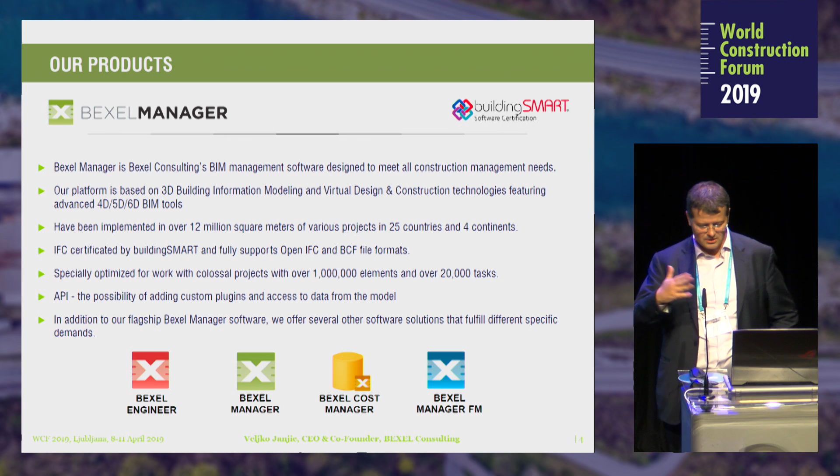Also, what is very important, as I mentioned in IT, we always collaborate and share. So we have our own API, so we can easily integrate our platform with any other solution. We did this integration with a number of companies, and this helped us a lot, especially now for sensor data integration, because every manufacturing company has its own standards. So now they could easily integrate with our platform.

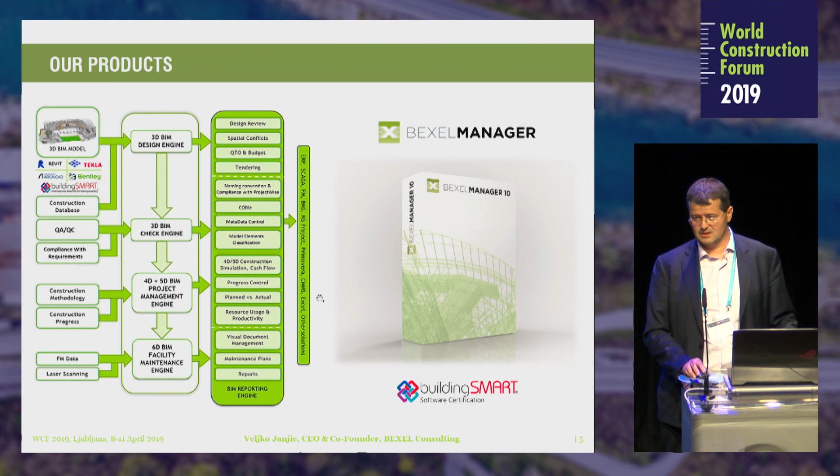So essentially, we have a 3D engine, which does clash detection, quantity takeoff, budget analysis, tendering, and so on. We have a 3D design check engine, which does design analysis, clash detection and a number of additional verifications. Then we have a 4D, 5D project management engine, and at the end we have a 6D BIM facility maintenance engine. So here I'm going to give you several examples from one project. We were among the top 6 projects in the world last year.

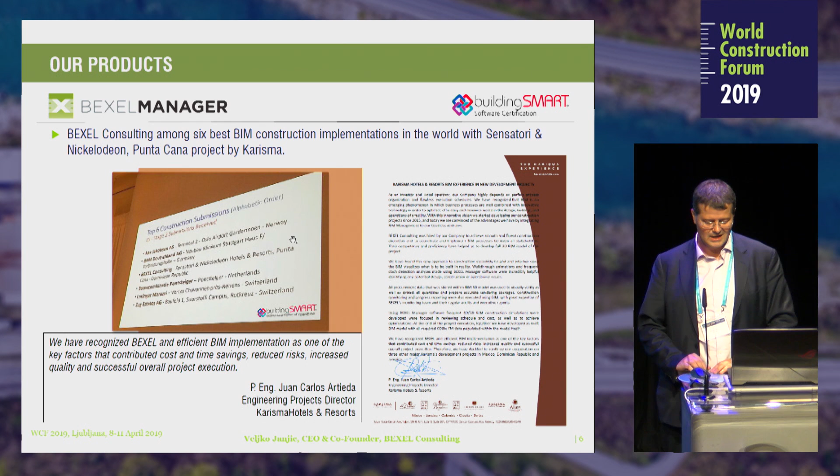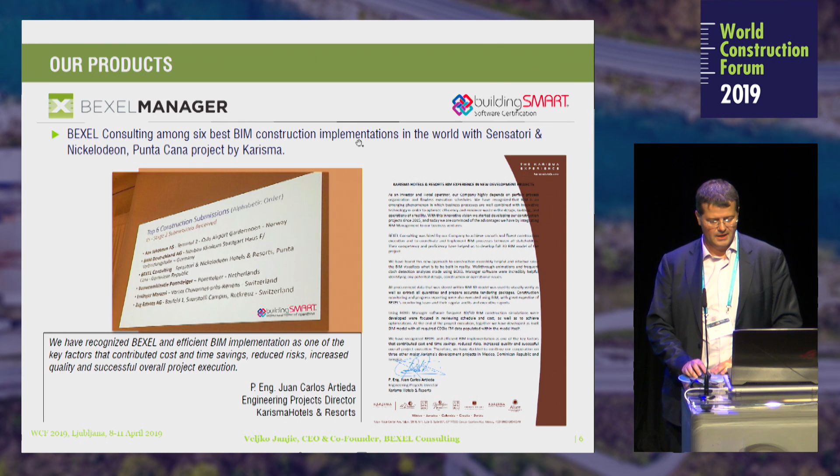This is a project, Sensatori Nickelodeon in Punta Cana, and the investor was Karisma. And this maybe is very important. We didn't pay for this, but this was done by the World Economic Forum. So they did the research: what is the key technology in construction in the future, and which is going to have the highest impact? And integrated BIM is on top. Everything else is of course important, drones, 3D laser scanning, prefabrication, and all other stuff, but integrated BIM is something which is the future.

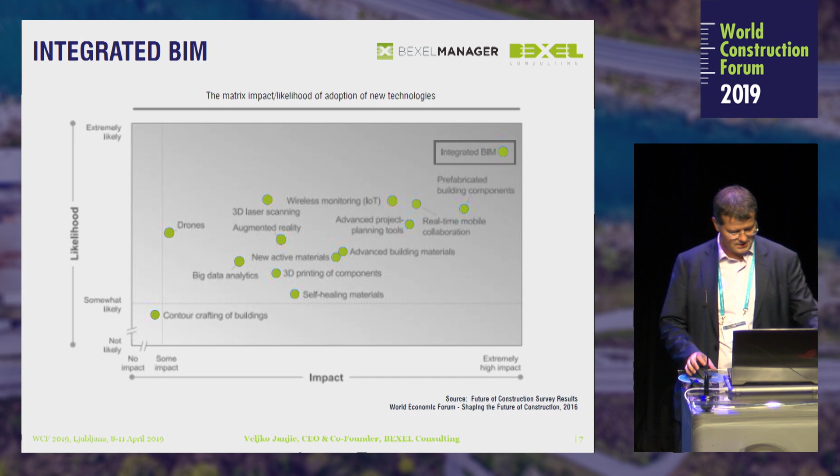And in this case, I'm going to show you now one first video. It's a 3-year-old video, so it's not brand new. Actually, now this project is finished. So this was done before construction commenced. This is for the next World Cup championship in Qatar. And we are BIM project managers on this project, and Bexel Manager is used for this project.

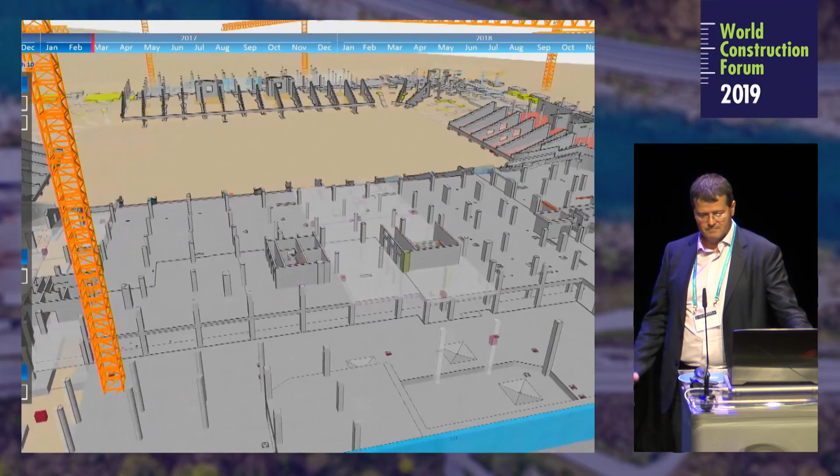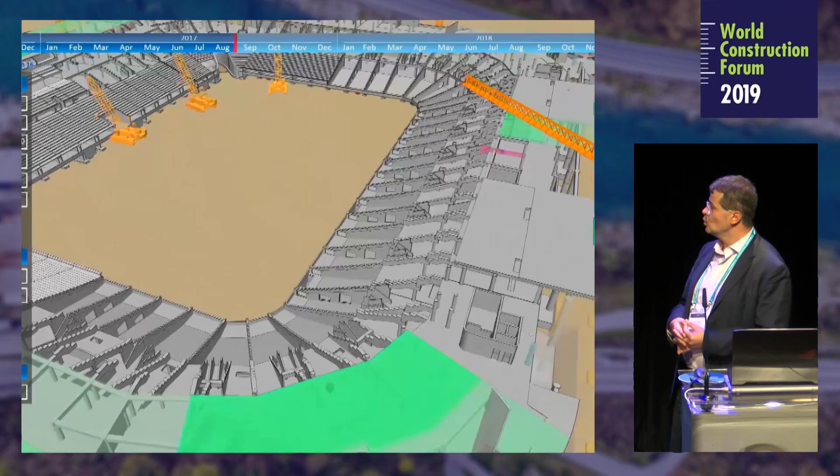So this project has more than 1 million elements, and the total value of the project is $600 million US. With our platform, which can automatically generate tasks in an intelligent and standardized way, the total number of tasks is more than 20,000. But what was very important is that you can very easily update the 5D simulation based on current progress. And actually, we are going to finish this project in a month.

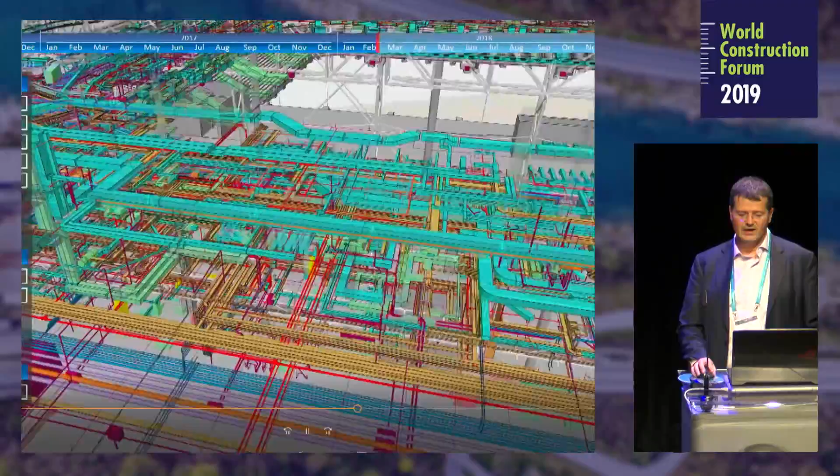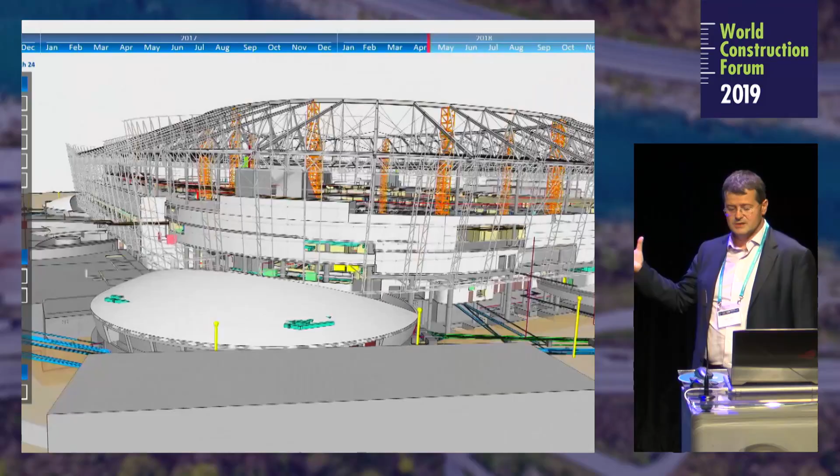So here, why do we say it's 5D, what does 5D BIM mean? You have the 3D model, you have time, which is 4D, and then by convention, we use money as 5D. Here are percentages because the exact data is classified, but the total amount, as I mentioned, is $600 million US dollars. So you can see with this integrated approach you can really organize your works in an efficient manner. You can track the progress, you can track monthly payment certificates, and you can really manage the project until the end.

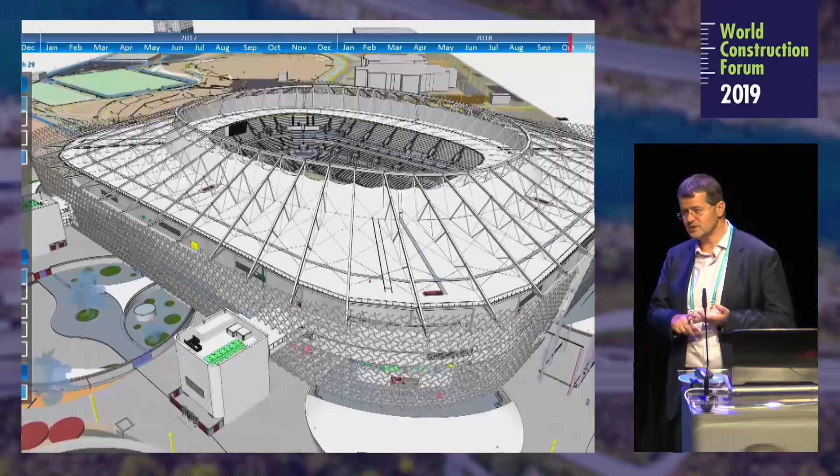What is also very important is the asset management aspect. So now every element has attached all documents, all COBie data. That's one international standard we use for the facility maintenance stage. And so all maintenance plans are attached. So the model is now fully ready for the asset management stage when it's finished.

So now just to give you a short overview of the key benefits of what could be done in this integrated approach. We name them use cases, but these are just the most important ones. So first of all, visualization. Of course, for the investor in this case, it's very important to visually see, do they like this project or not? So this is one benefit. Again, these are real visualizations, not like in other systems where you have 3ds Max when you try to impress someone. Here you can see all flaws even in this design.

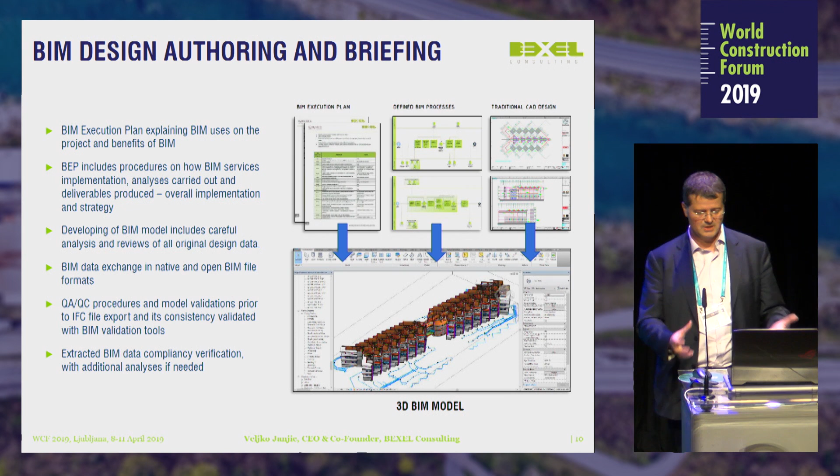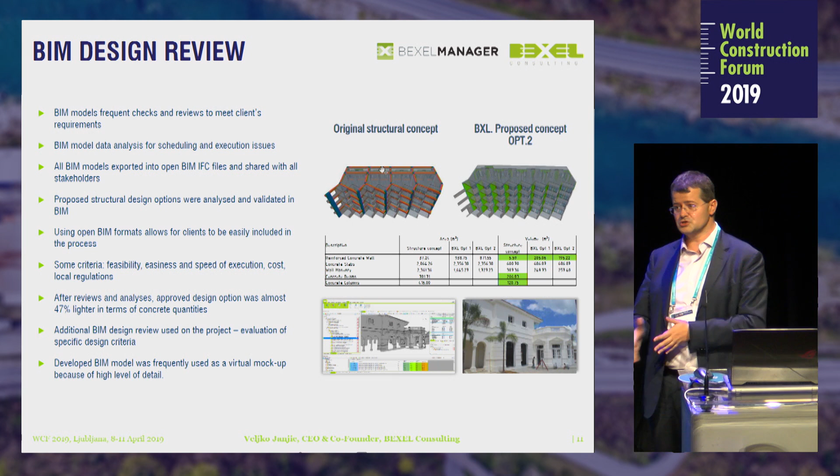So these are visualizations. Then you have to define all your processes, how you integrate the model. In this case, we use a number of different BIM tools and integrate them within Bexel Manager. Then you can do design review, optimization of design, which is also very important. What is crucial is the latency. Whenever you change something in design, you immediately have the impact on cost or quantities and so on. So you can really optimize something. In the traditional way, when you change something in CAD, you need to spend an additional 2-3 weeks to verify how the quantities are changed.

Then automatic clash detection. This is something which is now commodity and standard. A number of tools have it. Very important is that you can easily, in less than a second, detect clashes. For example, just one rhetorical question. On that particular project, Al Rayyan Stadium in Qatar, the total number of conflicts, clashes we have found so far, is more than 100,000. And I don't want to name designers. There are 9 design companies, and the lead design company is one of the most famous. And they didn't do anything wrong compared to previously done projects. The challenge is that we as humans cannot identify those clashes easily.

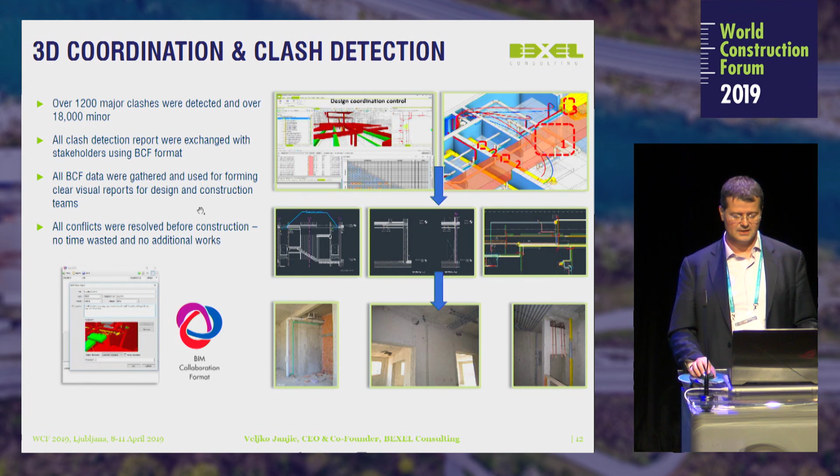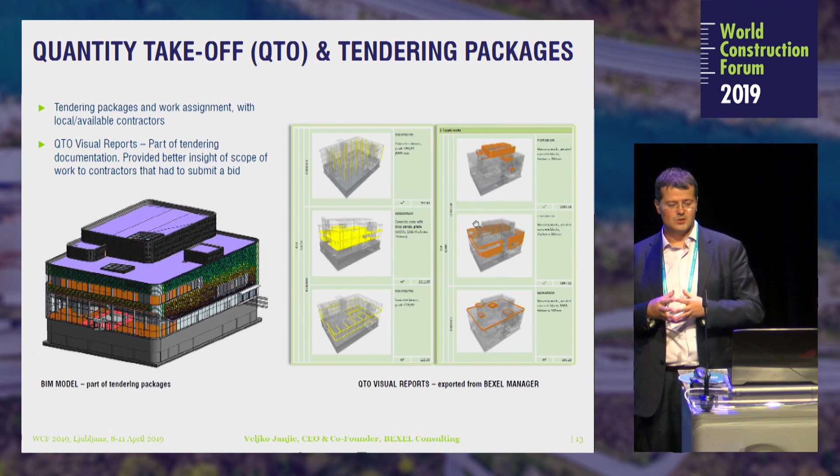Then quantity takeoffs, very important. You can visually see where those quantities are. So the risks in the entire project management are much, much lower. And that is very important.

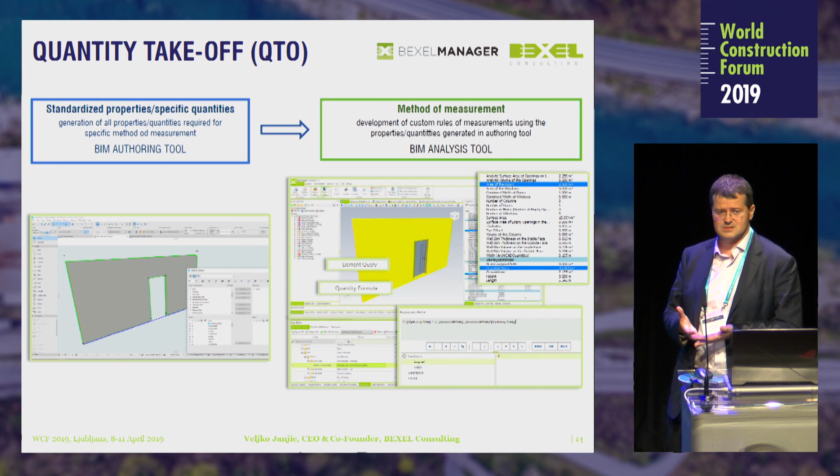Then there are standards. We have now, for example, in 25 countries, in America, the UK, Russia, Kazakhstan, Japan, Korea, Germany, Italy, Spain, Slovenia, Bosnia, Serbia, Austria, various classification systems and cost databases, and they can work easily in Bexel Manager. What I envision, I strongly believe, is that in the future, in 100 years, we are going to have the same cost database or the same classification system. I know that now someone is thinking, what am I talking about, Germans will never change their standards.

But that same story was, could you imagine 250 years ago, before the French Revolution, when someone said, we will create one thing, we will call it meter, and everybody in the world except Americans and Burma will use this as a standard. At that time, we had more than 1,000 different measurements for length in the world. And we somehow agreed that it's efficient for us.

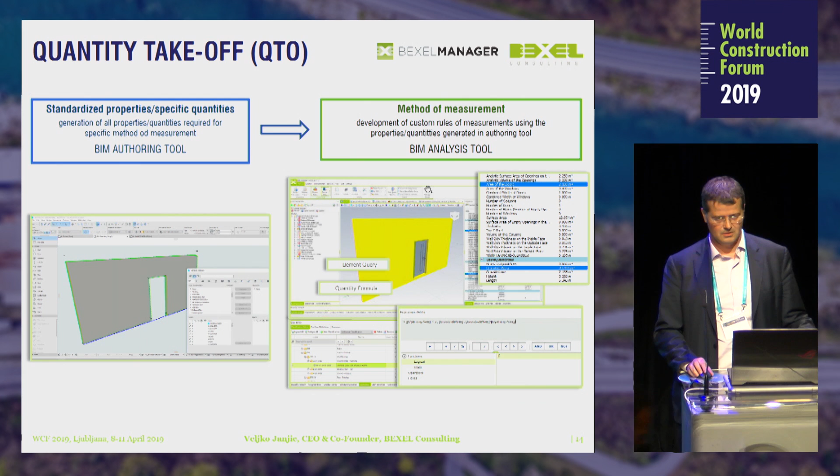The same goes with this. Why do we need to have a different cost items classification? The buildings are the same. And gravity is the same, so there are no specific rules to have it. But anyway, in order to be present at the market, we now develop these BIM cost databases. And they're very important for us, because when you know formulas and you know which elements, this could be done automatically in our system.

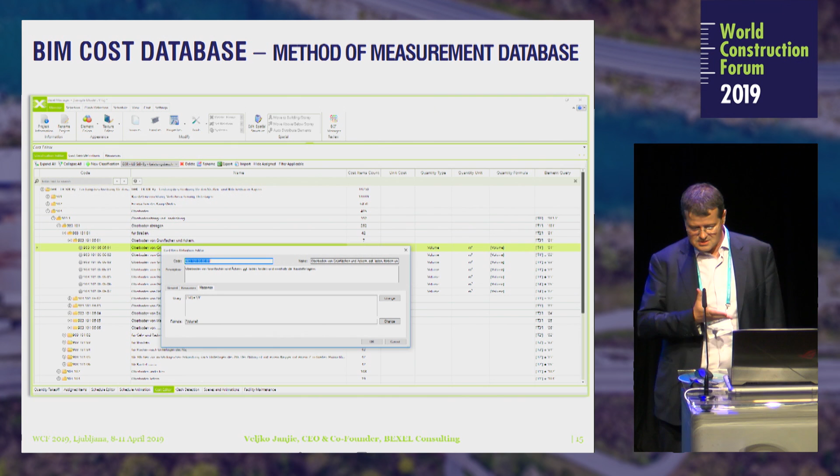Unfortunately, we don't have so much time to elaborate this now. You can, in a second, generate the entire cost for a building. And it could be later adjusted based on your experience. But this is something which is really feasible and doable. And if you think as someone from, I don't know, the airplane business or any other industry, you will realize that they are doing the same. They have the tools and methods already developed for these things. So this is something we implement as one very important thing.

Another very important thing is how we generate this 5D simulation. It's not manually generated. We know a number of information in the building information model. So we know that those walls are concrete walls. We know that those windows are on the 5th floor. We know that those ducts are in building B, and so on. And then we know all those details, because building information model is not visualization, but everything is about data. Data are crucial. Metadata are crucial for us.

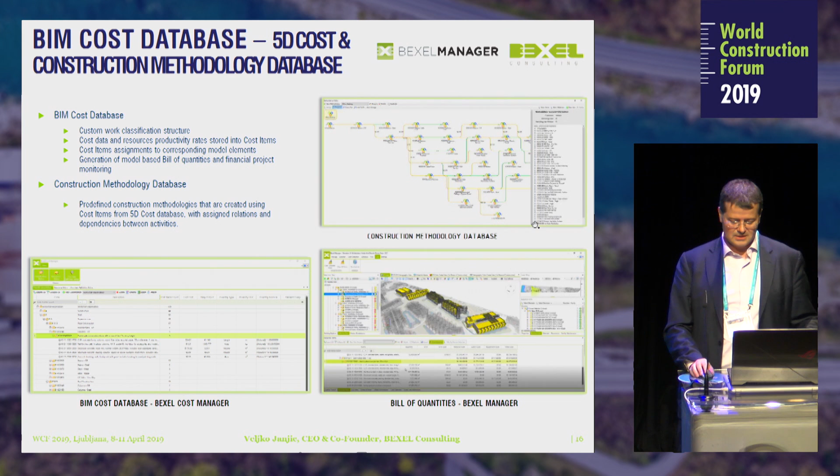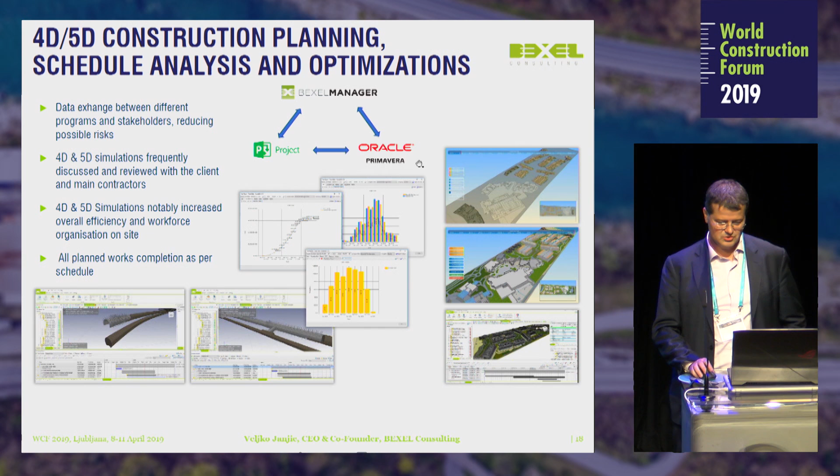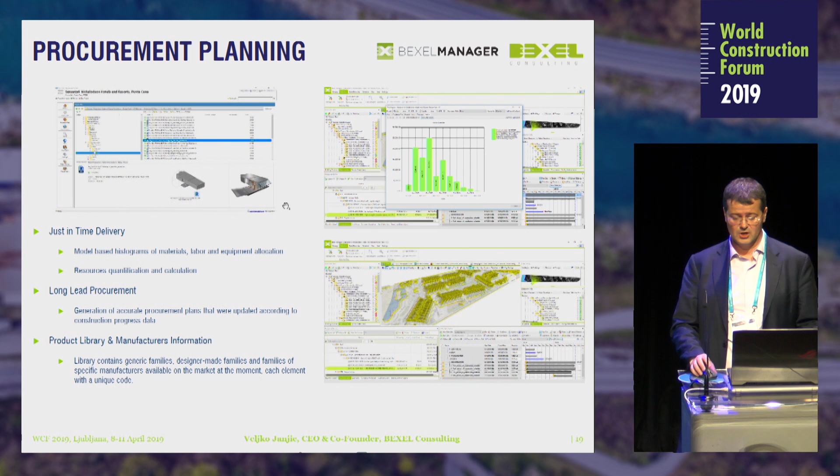So we just explained with these methodologies to our software, to Bexel Manager, how to generate this automatically. And it did this automatically, and then later we could optimize the schedule. You can then export this to Project, Primavera or any other traditional Gantt chart tool for project management, but we strongly believe that the future, especially in the construction business, is an integrated BIM 5D solution approach. Then you can do entire procurement, so you know all statistics, materials, everything integrated in one approach, in one system, and this is very important for managing, especially for general contractors.

Then how do you do monthly payment certificates? We trained four field engineers on that particular project. The general contractor is Larsen and Toubro, one of the largest general contractors in the world, and they just isolate the elements which are done every month. And immediately they have a monthly payment certificate. So it's not an endless discussion, you know, you are wrong, no, we are good, you forgot this, give me additional works and so on. It's very clear communication, and at the end it's beneficial for both parties, because you know who wins if this is not clear? Attorneys and lawyers win, and not we. And that's what we want to avoid, if possible.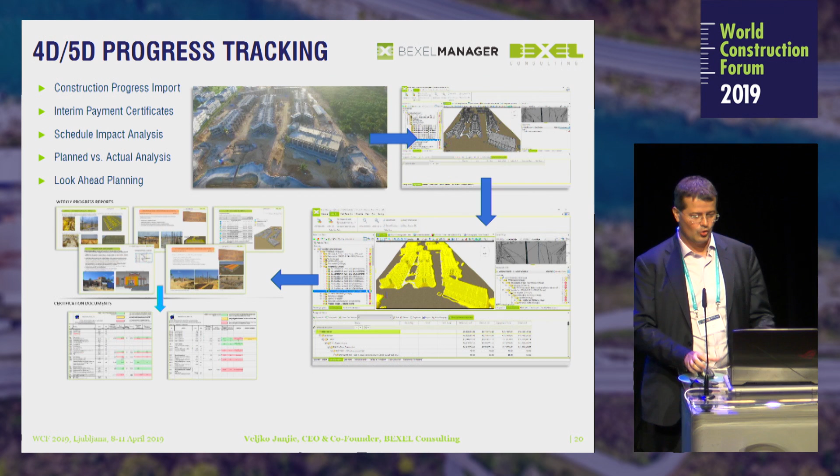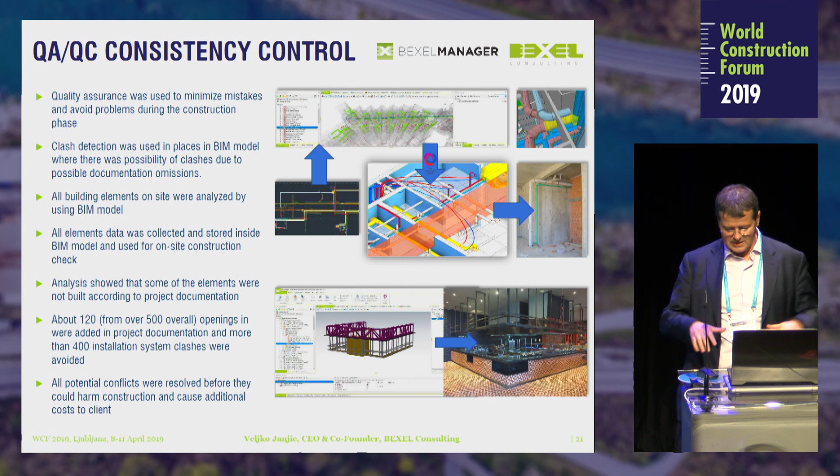Then you have integrated consistency control at the end, which is very important. You can overlap laser scanning or any other real data from the project and verify if it's according to construction, according to plan design. And what I want to mention now is the commissioning and asset management stage. With the commissioning stage, you can visually identify which is completed, which is approved, which is in progress, which is not, which is failed, and so on. In the traditional approach with CAD drawings and manual checking, you usually forget to verify a number of elements in the building because it's done manually, and we as humans cannot have an idea about all elements in the building.

What is now very important is the 6D maintenance stage. So what we do, we integrated every element or group of elements with documents. It could be as-built documents, photos, user manuals, as-built drawings. Any data which is important for us, we integrate them, and we have what we call a visual BIM database. So it's not just the documents, but they are always connected with the BIM model.

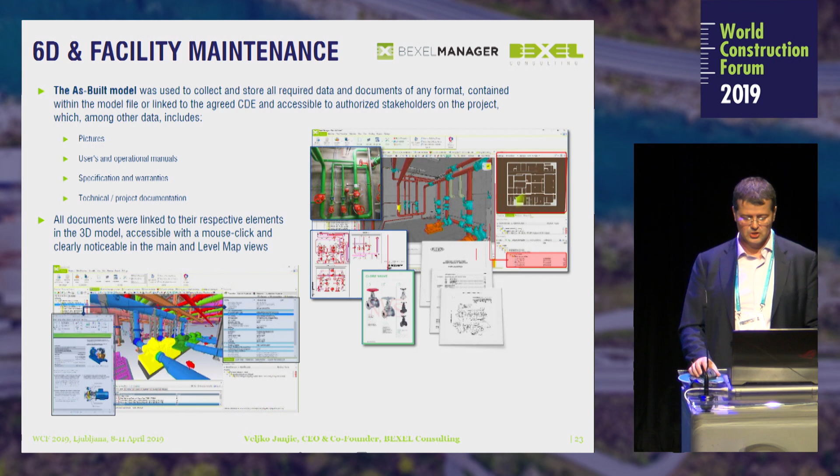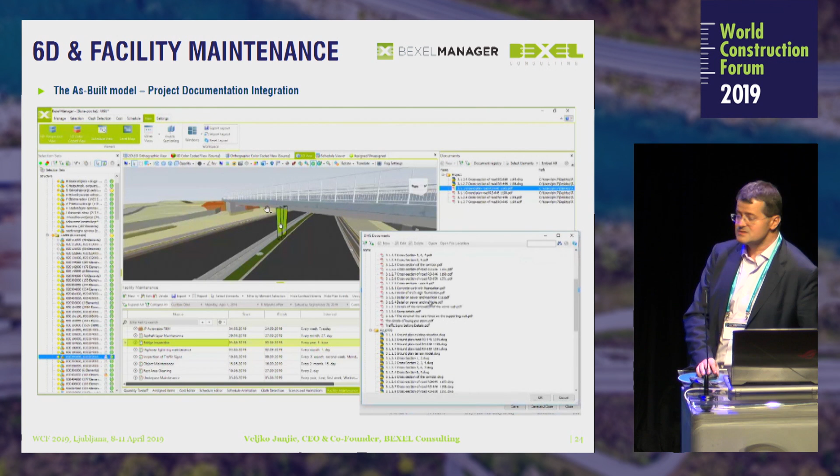This is one highway project where, when you isolate this element, you have all maintenance plans and documents attached to it. So you know what you're supposed to do, and all maintenance plans are directly attached. You can see the period, everything is defined, and this is very important. This helps us in the maintenance stage. So these are documents. I isolate the boiler, I see this. I now define here all maintenance plans, so everything could be done to the specific element or group of elements, which is very important. That's what we are, for example, now doing in the Assets for Rail project.

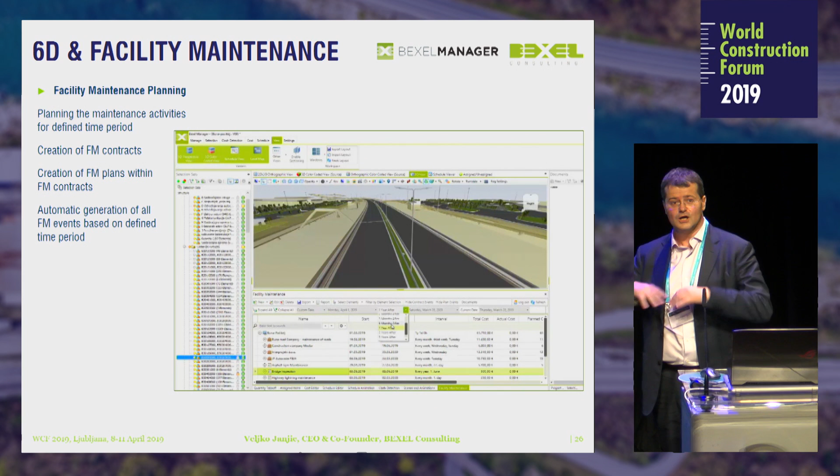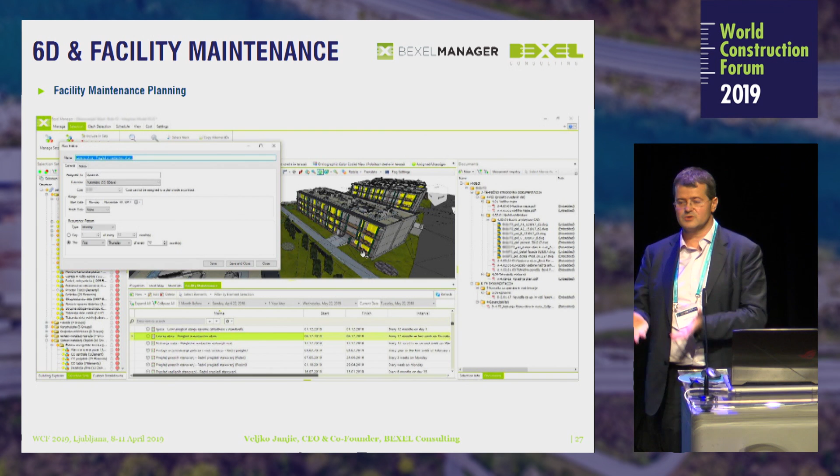We are now not just integrating maintenance plans, they are already there, but sensor data, because this is, again, a new level of abstraction, which is very important for asset management and facility maintenance process. So what is good also, when I isolate the maintenance plan, it immediately shows me where are the elements which are related to that maintenance plan. And this is very, very important. So these are all activities, entries, what's done, when it's done, and so on.

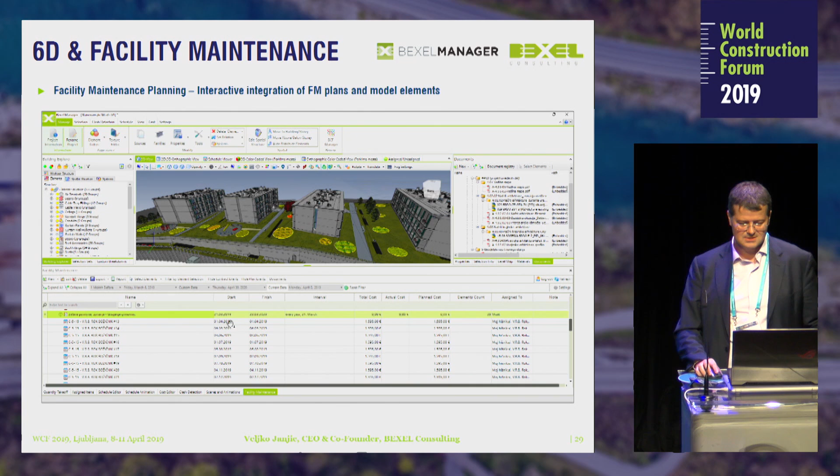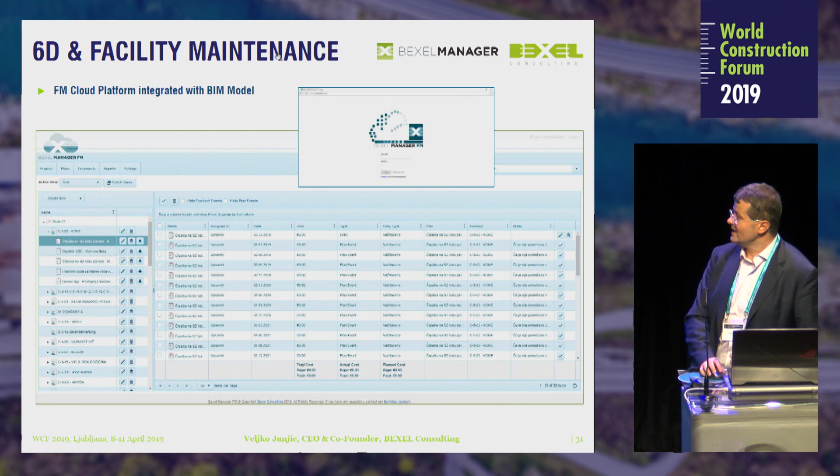And you can plan the entire process on desktop level, or this is our cloud-based solution. So all those maintenance plans and documents are on the cloud. And at the end, the idea is that the user has the ability to have everything prepared, if it's properly done from day one, for the facility management and asset management stage when the project is finished.

So what is important, this is also APIs, and we had an interesting discussion last week, actually 10 days ago in Düsseldorf. We, as, let's say, we are talking about digitalization of the construction industry. We got a round table and now decided to create a new room in buildingSMART. It's called Digital Twin Room.

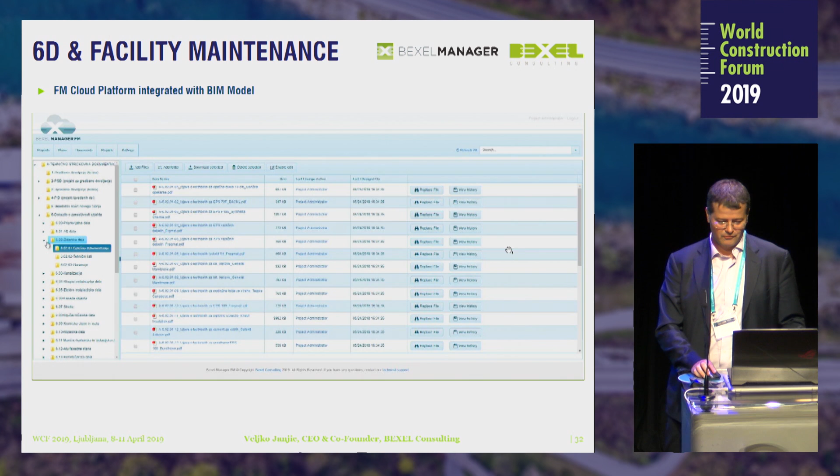And our vision is that by standards, one, I mentioned IFC, second one is BCF, there are a number of additional standards, and by developing APIs which will enable our tools to collaborate, we will have a future much better for the construction business. So these are various reports and so on. You can follow us on this detail. But this is essentially very important for an integrated approach.

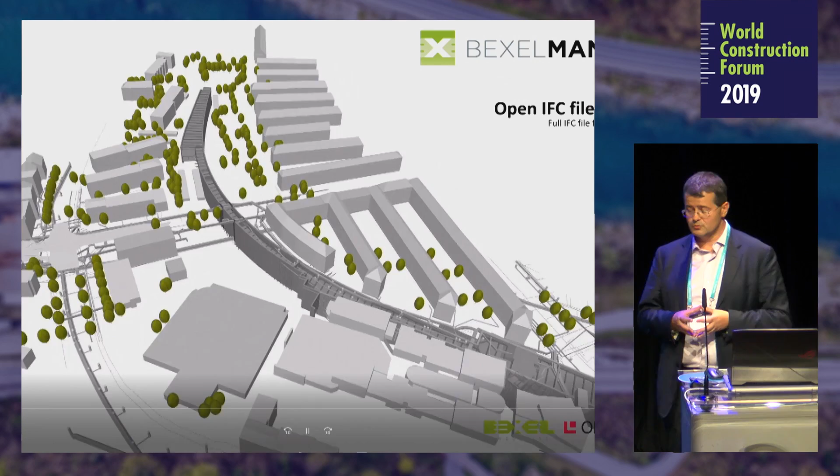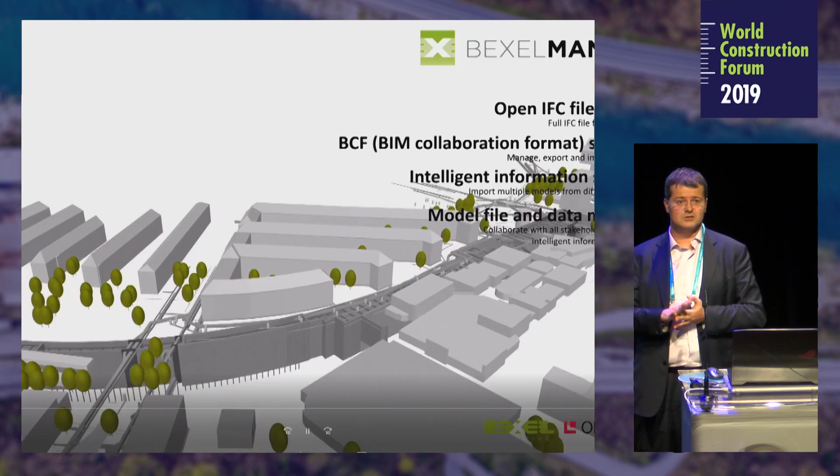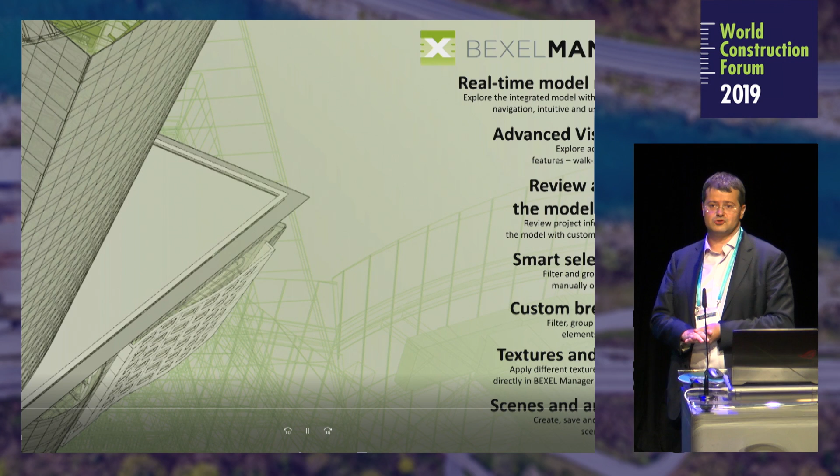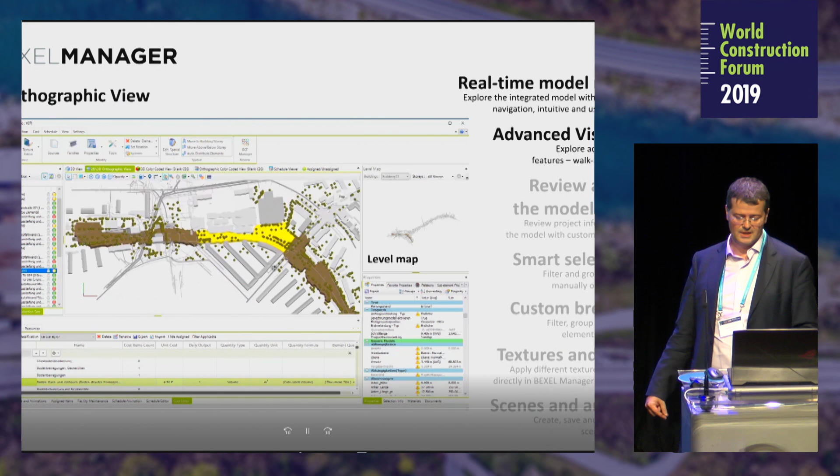And I would like also to show you something we did 2-3 days ago. We finished this. This is an integrated system we did together with Obermeyer. It's one metro project in Germany, and actually tomorrow this is going to be presented to Deutsche Bahn, because now they're evaluating this approach for their future projects. You know that Deutsche Bahn decided to invest a huge amount of money in improvements in their railway network.

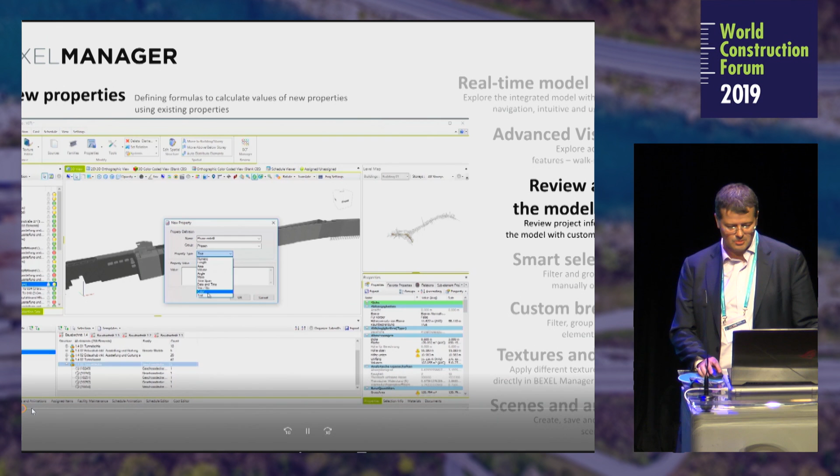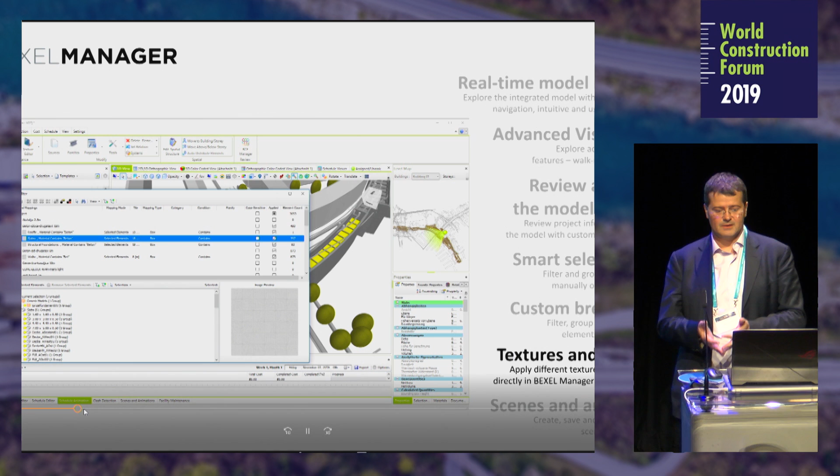So here you have, this is from Bexel Manager. You can visually see every element, group of elements. Here are now additional properties data. Then you can isolate based on certain groups, categories, quality of, let's say, earth and so on. So these are groups of activities. And for every one of these elements, you can immediately see if they are properly defined, if something is missing or not. The system can automatically do clash detection, so we verify design. We can collaborate with others, so BCF format is used for collaboration.

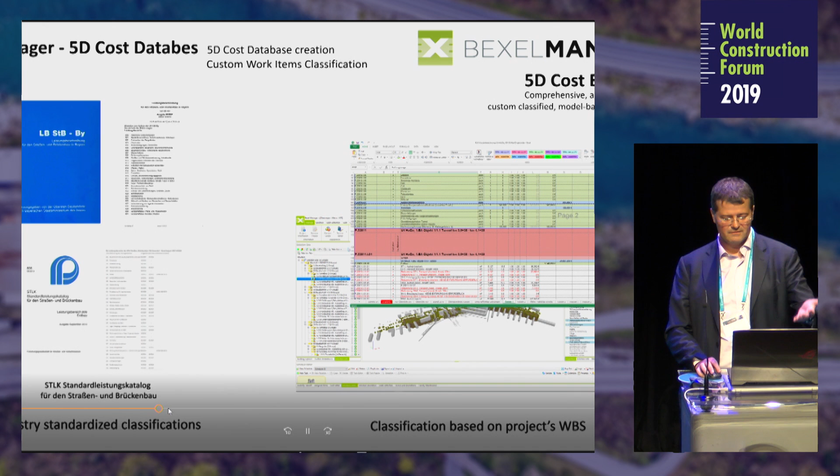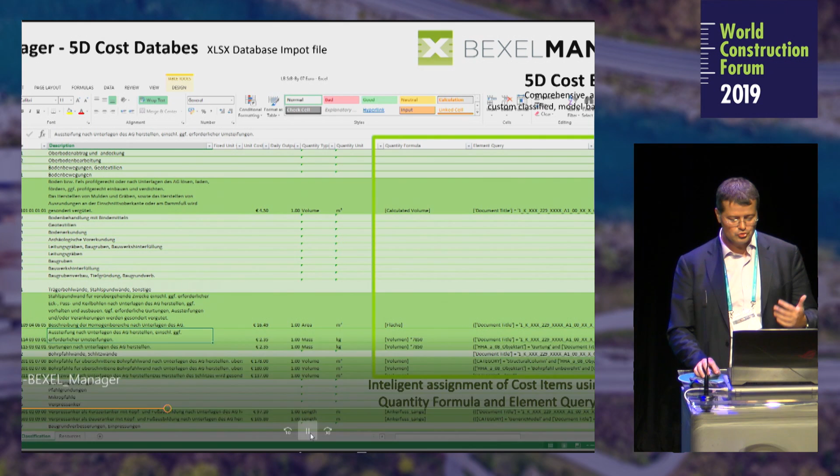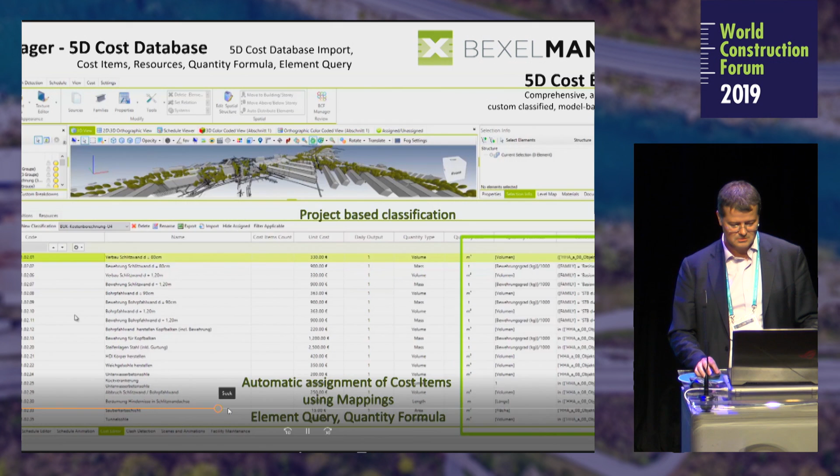Then this is a 5D cost estimation. Over there we are using a national German standard classification. And here is how we do that. We explain to the system which elements with which formulas are supposed to be attached to certain cost items in the German classification system. And when you do that, you can import this, and the system will automatically, there is a magic button, it's called auto assign. So now it used all those formulas, and with auto assign, here is the entire cost. We see that it's 44 million. And then this could be adjusted.

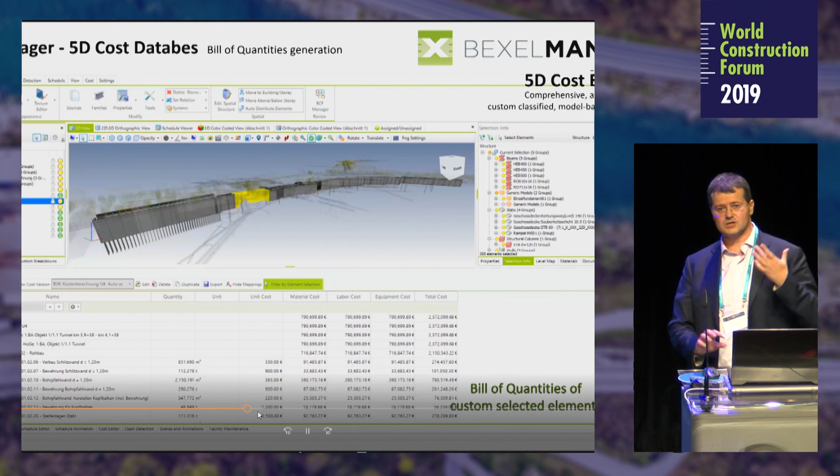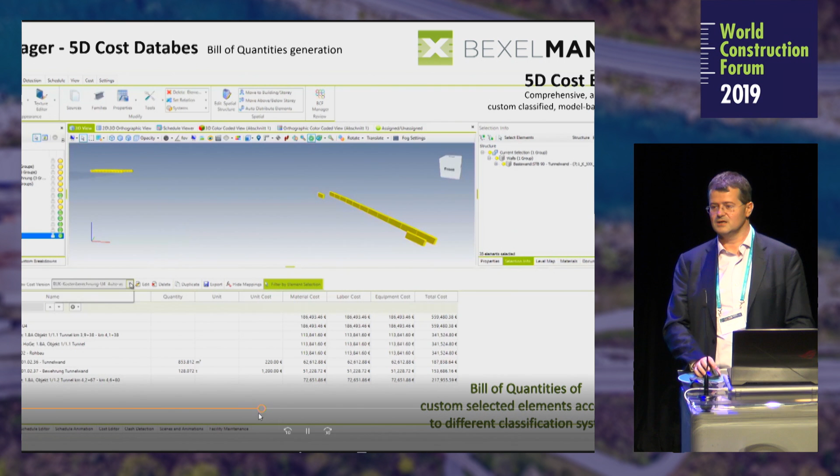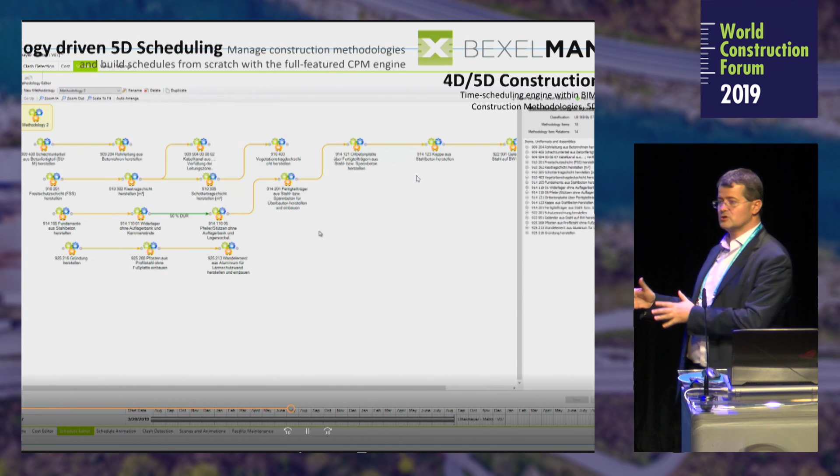And what is very important with this, whenever we change design, and the only constant thing in construction is the number of changes, whenever we change or update design, the system will automatically give us the updated cost. And then this is a methodology, again, developed and tailored to the needs of German methodology for railway and metro projects. And the system, by knowing that methodology, automatically creates this Gantt chart, animation.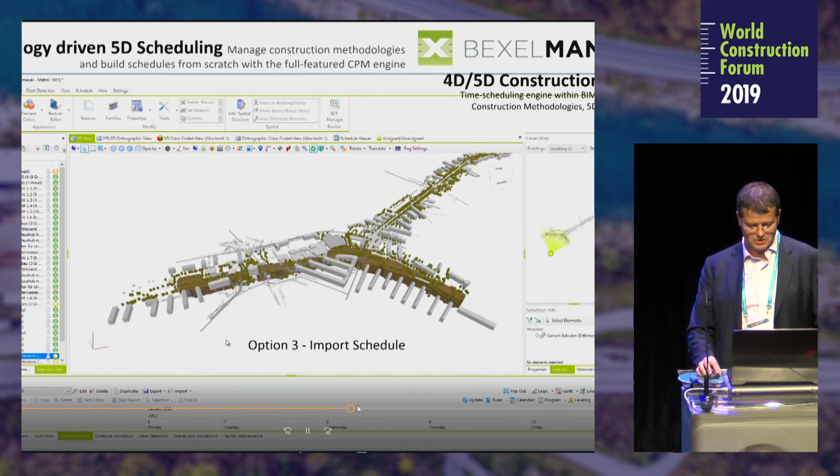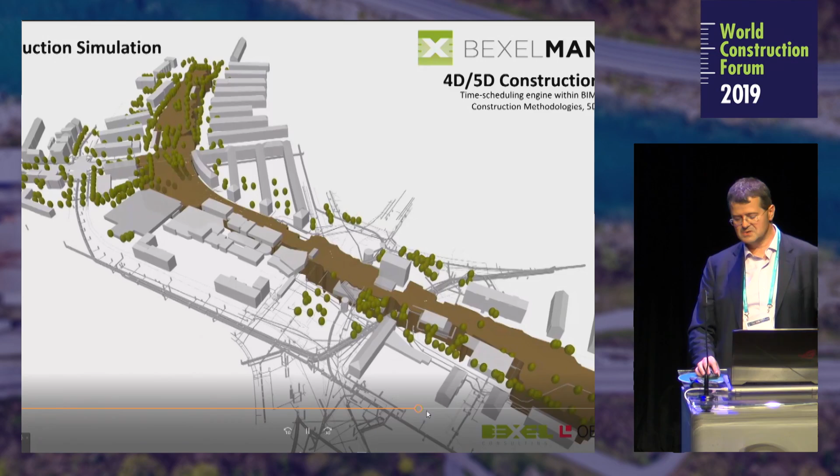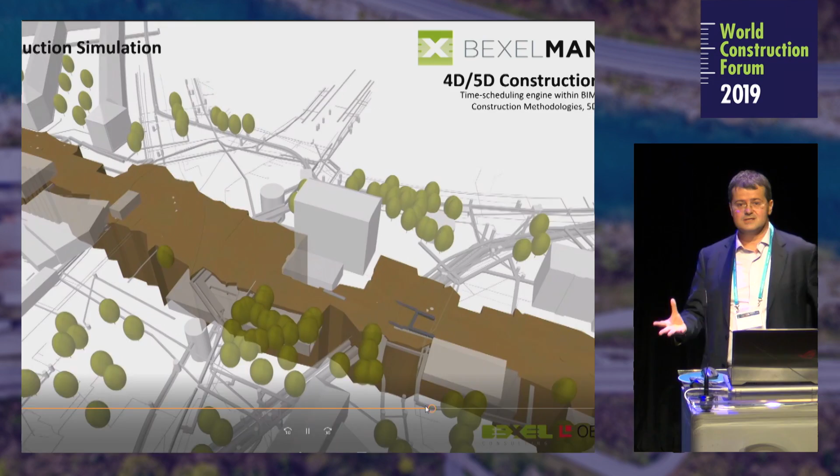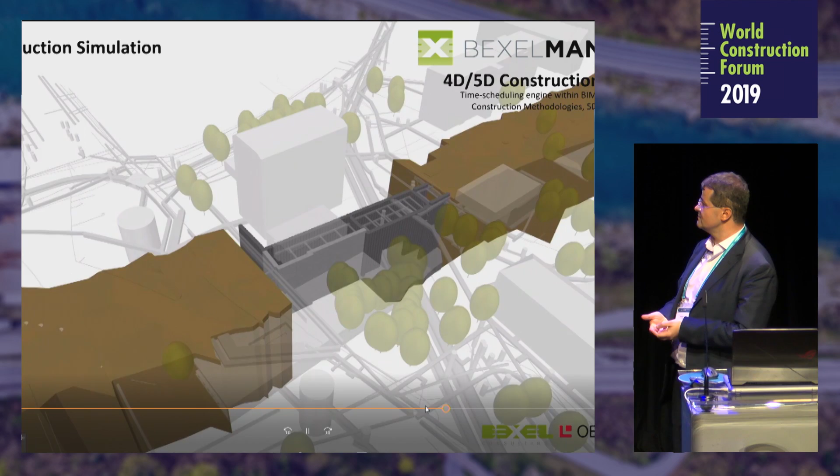There are a number of things, we don't have so much time, but resources, leveling, planning, and so on. And at the end, you see a sample video automatically generated with all cash flow analysis, resource usage analysis. So the idea is really to have an integrated approach. Then, as I already mentioned, you can track the progress based on real data, earned value analysis, planned versus actual, and so on. And what is also very important, to have properly defined asset management and facility maintenance data, and have a full solution ready for facility management.

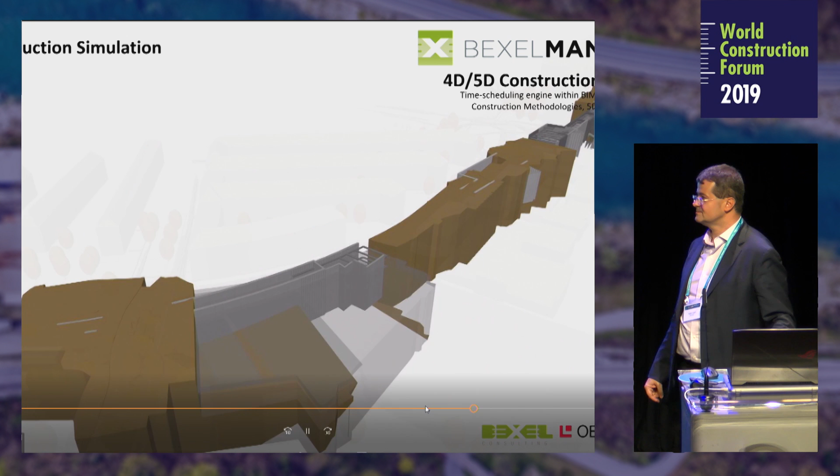Thank you. Thank you very much, Veljko Janjić, for a very nice presentation. Are there any questions or comments to the presentation? We can change the computer. Yeah. You can leave it for now. He will come. Okay. Please.

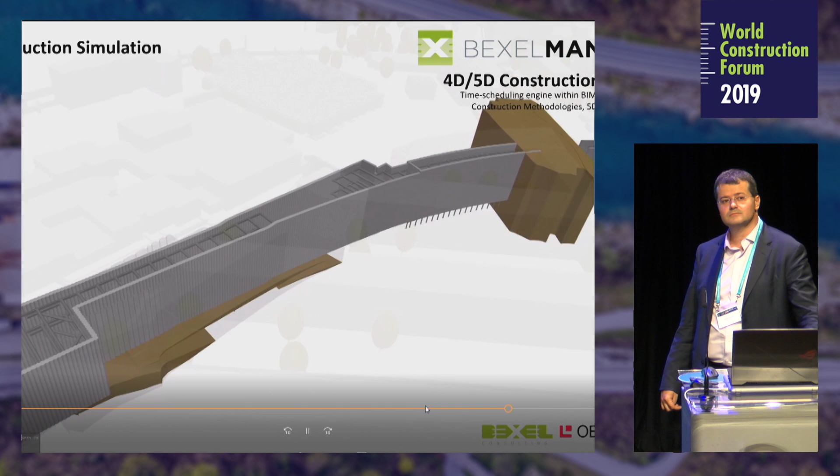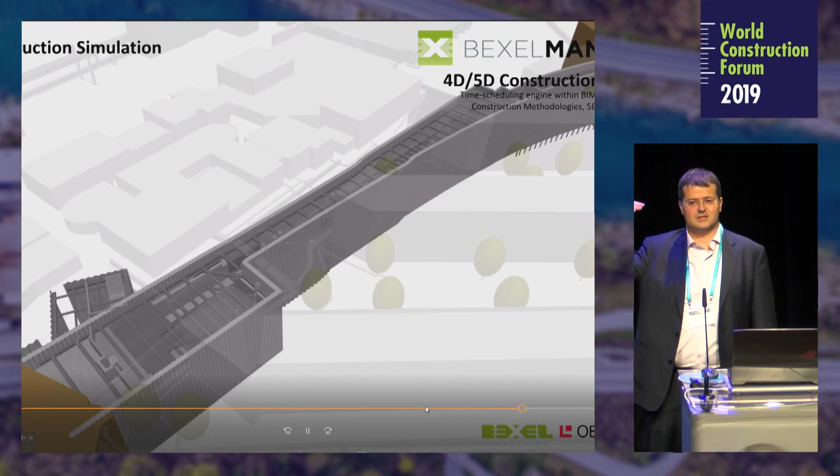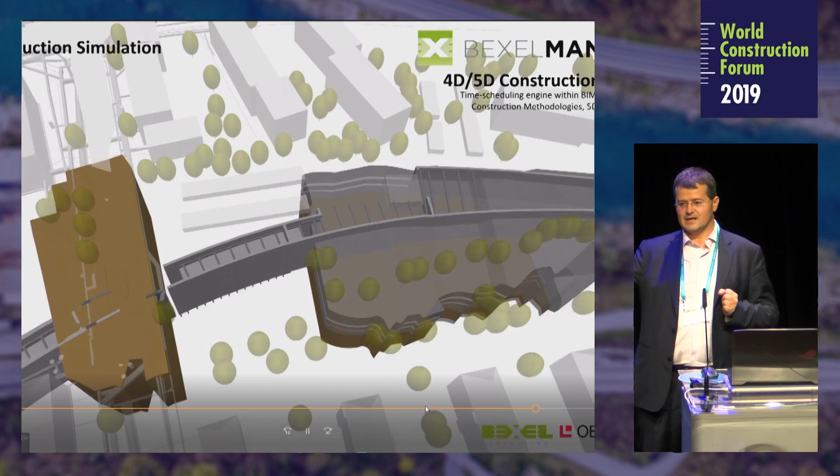When there is any change on the buildings, how do you calculate the human cost, like the workers, when changes are happening? Okay, so we call this BIM cost databases. You have a standard cost database with a classification system. You have two additional properties. The first one is called formula, and the second one is called BIM query.

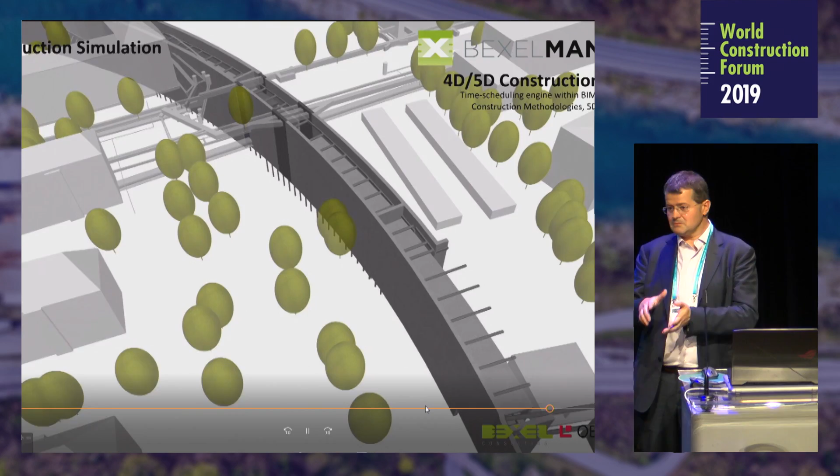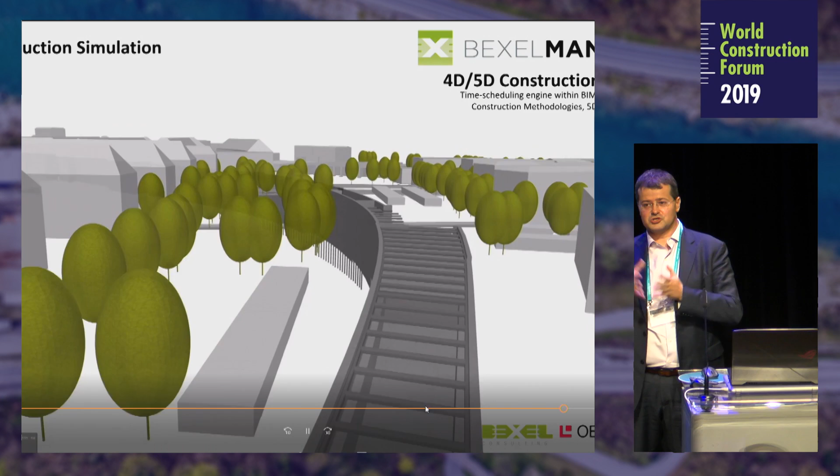So the system automatically, when you have a properly defined BIM cost database, finds certain elements and then uses a certain formula for quantification. So it could be volume, could be area, if it's formwork, could be twice the area. Or just to give you an idea, in ex-Yugoslavia, it was a standard when you're doing painting, when the wall is less than 3 square meters, you're supposed to add 15% on top, just for small walls.

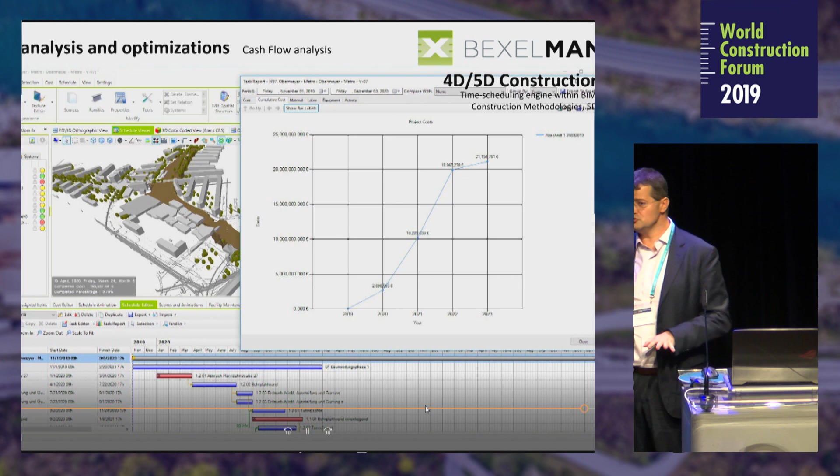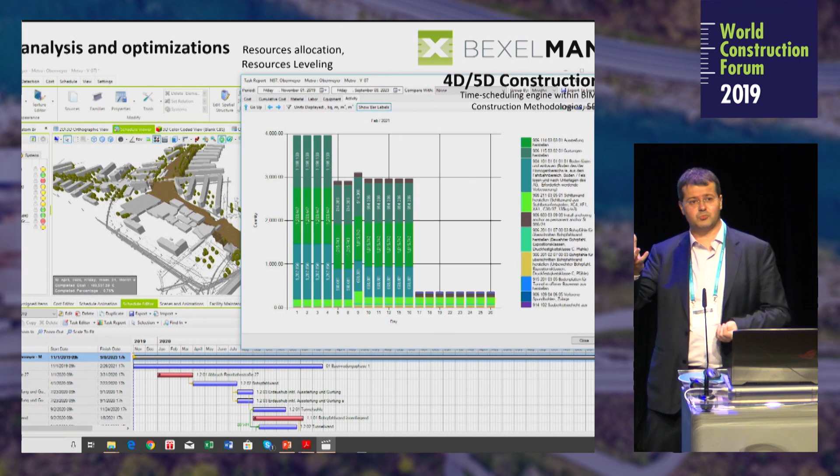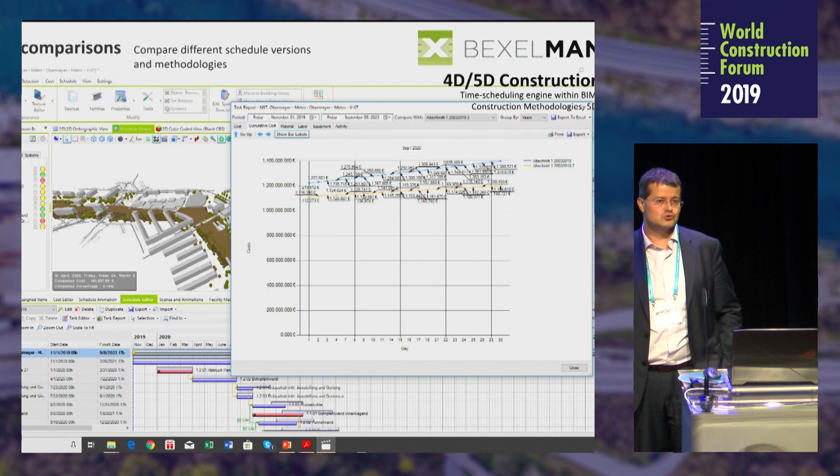And the same is with the new rules of measurement of the SMM7 standard in the UK. So you can apply a different formula for the same type of work based just on the size of that element. Or in vertical transport, if it's on the 50th floor of the building, you can add an additional percentage for crane work, compared to the wall on the first floor. So this is what we strongly believe is the future of quantity surveying and cost analysis.

Yes. Okay, so this is just an example of how planning looks. So these are per every month, not just visually what's supposed to be done, with the entire cost data. So we try really to simplify the process. Okay.

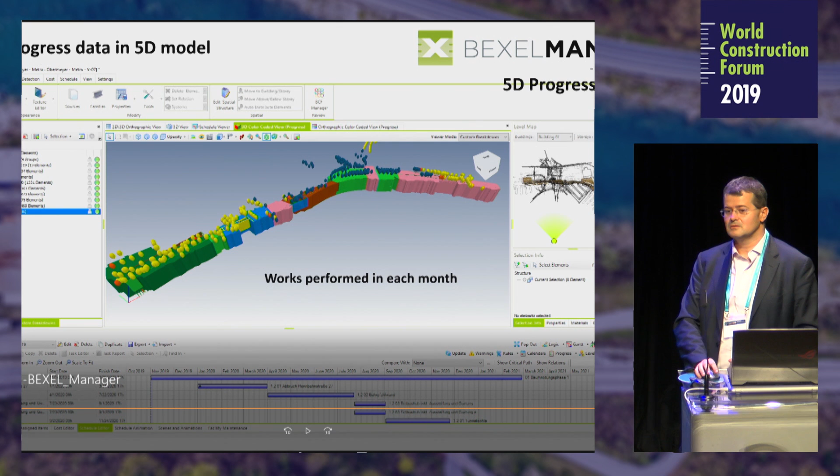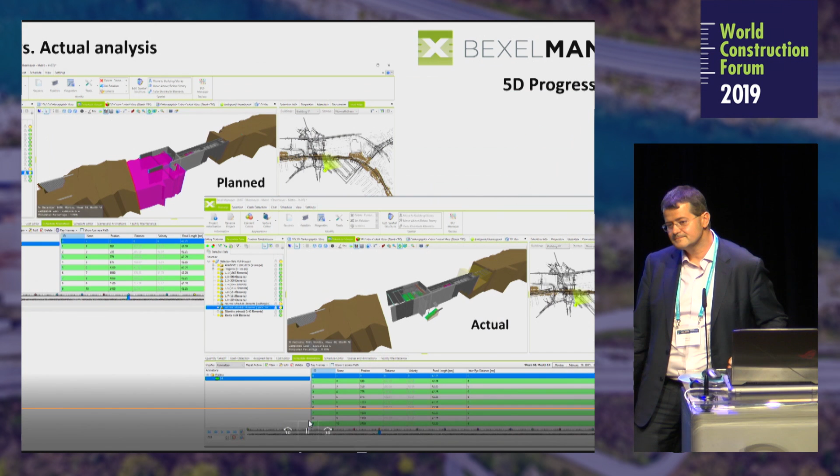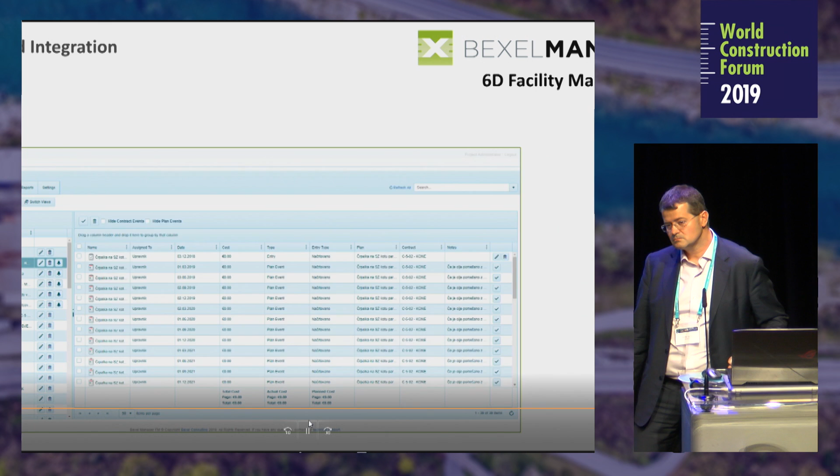Have you estimated the cost that you have saved by avoiding the clashes in Qatar? And how much did the whole BIM implementation cost? About the first question, the process was defined. We were in charge of managing the entire process, so it was twice a week. It was too much, but the Supreme Committee, the investor, required the model to be updated twice a week. So you immediately send all clashes to designers, and they have to update and submit an updated model twice a week. And that's how we solved all those clashes.

Yes, I'm asking you about the profitability of applying BIM in this case. This is a very good question. What we realized at the end is that it didn't take more time for designers compared to traditional design. And now, for example, where we are designers, we never go the traditional way, because for us it's faster to do design fully in BIM. Not just that, whenever changes come, we can do those changes much, much faster. So that's why we are using BIM, not just because it's a requirement, but because it's beneficial for us. It's faster, more reliable, and adaptable to changes.

So when we defined all those processes, there was no additional work. What we realized is that essentially it was slightly less than it would be with traditional. Of course, you need to have some sort of learning curve. So if it's your first project, then maybe you will need some additional time. But now all main design companies in the world are working in BIM. It's not a question.